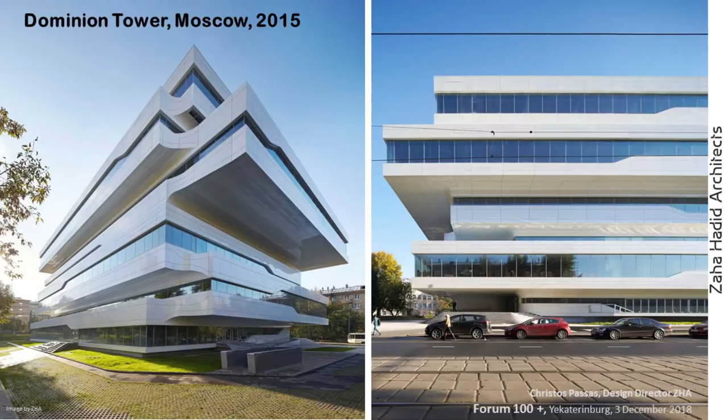My particular engagement with architecture in Russia was when we started the Dominion Tower around the year 2006. When I visited the first time, it was a very interesting and in many ways eye-opening experience, because Russia was in a transformative period at that time. In 2015, when this project was finished, a lot of things had already changed. Most of the ideas about this particular building look back into those kind of constructivist, radical spaces where the idea of architecture as a gravity-less space becomes possible to think about. I think this idea of humanity's adventures opening into space, but also understanding our relationship to the ground, the land, and the way we produce ideas, became rather important.

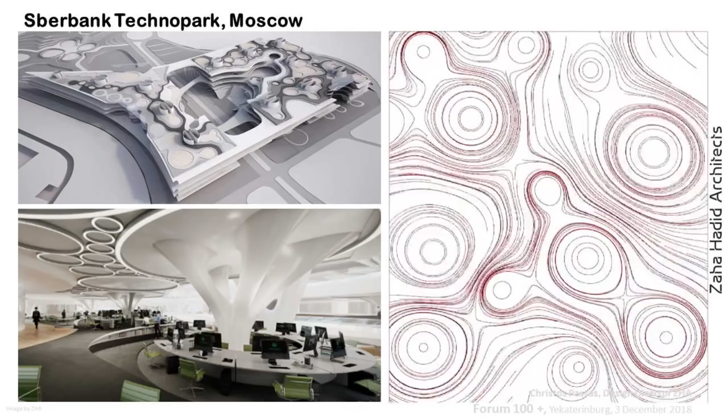I'm happy to announce that this project is now on site. The client is now looking for a general contractor to come along and build it. There is a big hole in the ground waiting for the basement works to start.

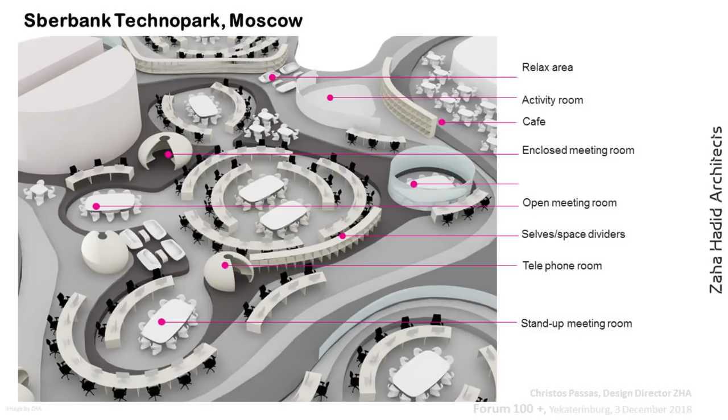Yes, this is the kind of ecology that I was speaking about. It's an open plan office, but also with cubicles where people can work in relative acoustic or visual isolation. Essentially it's this ecology of different types of spaces. Workers don't necessarily need to be fixed to a particular desk and laptop, but can take their machine with them and sit with people doing relevant work to collaborate and help with their tasks.

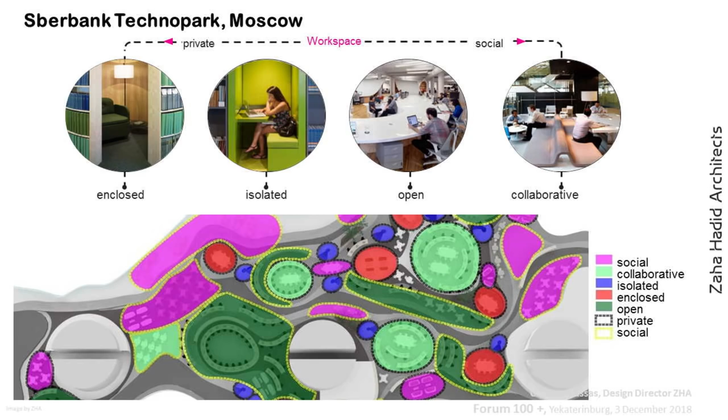So these degrees of privacy that I was speaking about, whether enclosed or isolated spaces or open spaces to work with 100 people, are all within one, let's say, soup—an ecology of conditions.

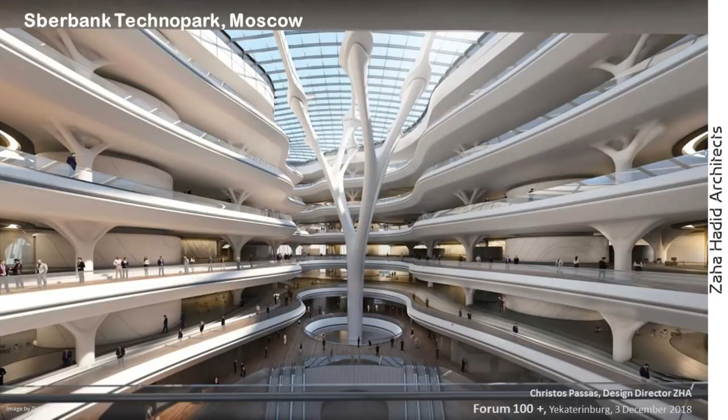Such a building needs to be driven also by its possibility to navigate through the space. The atrium is a pretty important feature, not only as a place where light comes in, but also a space where one can immediately get an overview and see where different things are happening, so they can freely and without the need of signage move to the right places of the project.

There is a big site around it which we want to bring inside the building. So the glass facade is designed as a means for controlling the environment and temperature, as usual, but at the same time to bring as much of the external environment inside.

In order to let the light penetrate as deep inside the building, we even lifted up the floor slabs of each floor to 6.5 meters, about 50% more than what is usual, so we can let light come in but also create a sense of space that is not compressed and very tight.

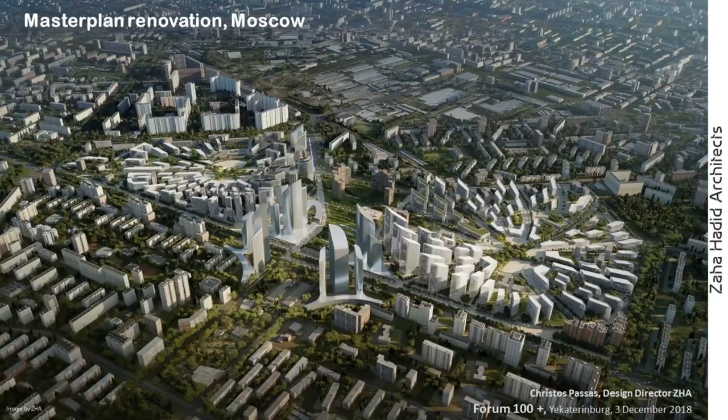Okay, moving on to the next project. This is our conceptual approach for the renovation of the residential quarters in Moscow. This is a rendering of the area of Kuzminki.

You may have heard about this project because the government had announced they wanted to investigate solutions produced by architects and other specialists on how to renovate the Khrushchevkas that were built in the 1950s and 60s, because that residential stock was already becoming old, and a lot of people are living in substandard conditions. The idea was to relook at how this modernist zoning plan is working, and to try to create a new sense of community.

Some key aspects here: buildings are laid in the landscape, but the spaces between them have a lot of trees on one side, though they're mostly occupied by cars. People love the trees, but the public space between them is indeterminate, meaning nobody owns anything or is responsible for anything. Therefore it becomes very difficult to take care of.

Our proposal was to create buildings of smaller footprint and higher elevation, so people can still have nice views and be in a neighborhood with fewer people, giving better possibilities to create a community sharing the same buildings. The most obvious thing was that these concept neighborhoods become areas with townhouses of 2 stories high, but also mixed-use buildings going up to 15 or 20 stories, housing shops, offices and apartments if needed.

So each one of these buildings have different characters. A central square is dedicated to public use and to the residents. These can be skating parks, these can be gardens, these can be places where people can use for barbecue in the summer.

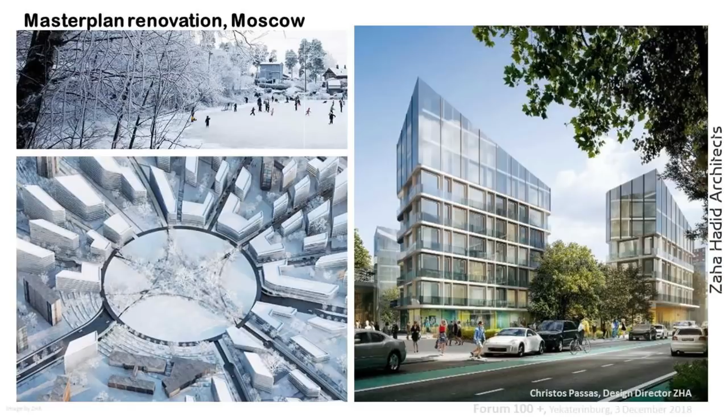But at the same time, the square urban block that somebody can see in Barcelona begins now to break and open up, so all the spaces between the buildings become more walkable. There is a definition proposed so that the gardens become both public but also private, meaning owned and taken care of by the residents of the building, so that the urban landscape becomes a little bit more organized.

And here is another project that we developed for the city of Novorossiysk. This is the Admiral Serebryakov embankment in the Black Sea. As you know, Novorossiysk is an industrial port, and we were invited there to offer a phased master plan, a solution where the city could extend, but also transform into a MICE type tourist attraction. There is a lot of oil and gas companies working in the area.

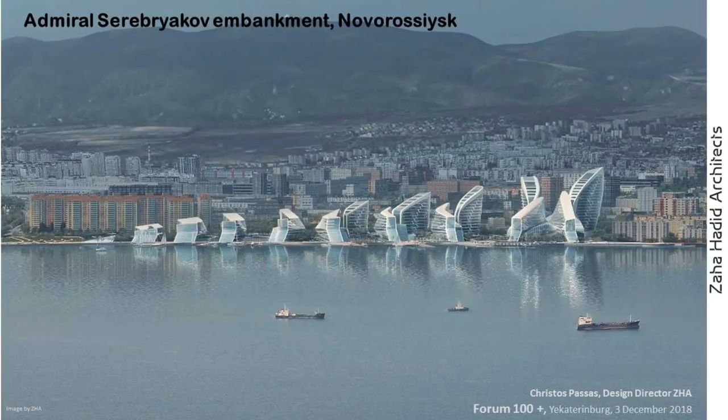What was important for the investor and also the city themselves was to create a project that could be developed in stages. Projects developed in stages are a bit of a nightmare for architects, because sometimes you see buildings that are literally chopped off in half and you're waiting for the next phase to start. So in this case, we made this problem into an opportunity.

We broke the phase down into 9 different buildings, starting from an anchor building at the very beginning, which consists of a mixed use agglomeration of a business hotel and a family hotel, a convention center, and a cinema. So we are able to provide a new facility, a new service, both for the local residents, but also for the incoming business tourism that would come there.

We are proposing the development of a series of marinas, of little docking stations, both for private yachts, but also for fishing boats that exist in the area.

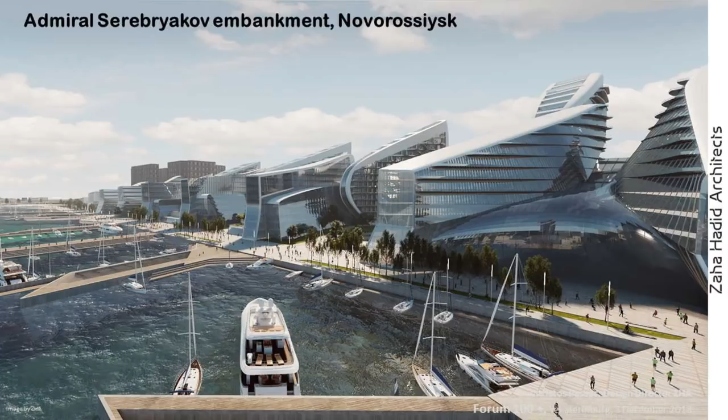And of course, the buildings gradually go down into different heights. So when we start with the tourist attraction in the beginning, we also go down very low toward the end, where we develop the end of the site into a botanical garden, where we want to collect seeds from plants of the area to store them in a safe place, and also make a kind of a gardening pavilion for people who enjoy more the kind of ecological arts.

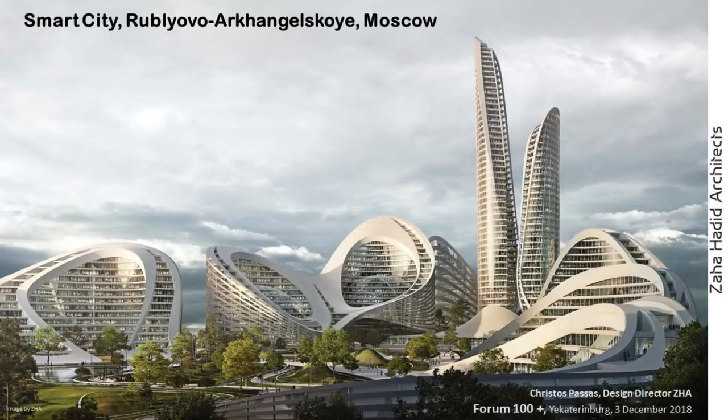The next project that we are working on in Russia is a competition we recently won together with 3 other companies for the Rublyovo-Arkhangelskoye area. This represents a proposal to develop a city over 25 or 30 years. This is meant to be a satellite city, a new heartbeat outside the center of Moscow.

We know Moscow is a city that is challenged by traffic problems. And what we propose to the client here is that the architectural future and definition of this city is not so important. We, in fact, proposed 2 different solutions for them within the time that we had available.

But we are proposing an urban master plan that consists of buildings of mixed use, where people can connect with sky bridges from one building to the other, where you can have shops and also residential units and sky gardens on top of these buildings, creating a new kind of typology for 21st century living.

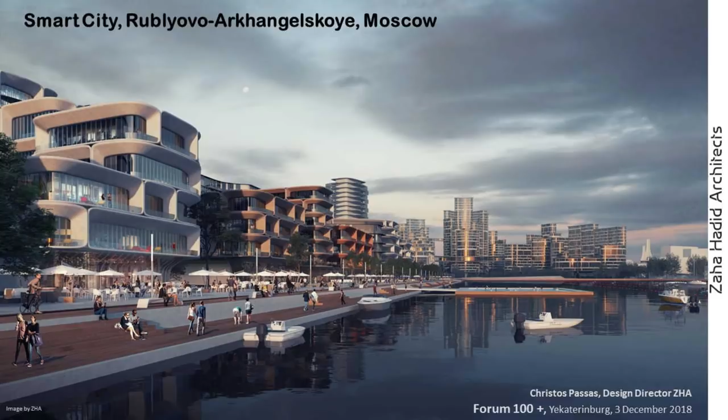We are also exploring the ideas of the residential spaces here, more than the business district, where the buildings are shorter, with more glass, in some cases with balconies, and opening up to a lake that can be programmed with swimming pool or recreational activities, so that people who live there can also work in this territory without having to go back and forth 2 hours in their car every day from the center of Moscow and back.

So the idea of the smart city is that we come closer to the environment, we recognize the realities of today's business and how we work, but also try to shorten those wasted times that we spend in the car, the fuel consumption, the pollution, and also trying to make spaces livable close to the place of work as a means of being smart about how we operate and live our lives.

So the point is, we are engaged and we are being asked to develop solutions in different aspects of architectural discipline. And one of these aspects is our engagement with cultural buildings, which is the second part of what I would like to speak about today.

I would like to start with this on the occasion of the Philharmonic Hall that everybody in the room has in mind. I hear there's been a bit of controversy, but what I'd like to concentrate on is what are cultural spaces, what are the spaces where, like today, we're sitting in this room with about 400 people, all interacting currently. There's usually somebody on stage, and I think this arrangement of the theater and the presentation is something humans developed a long time ago.

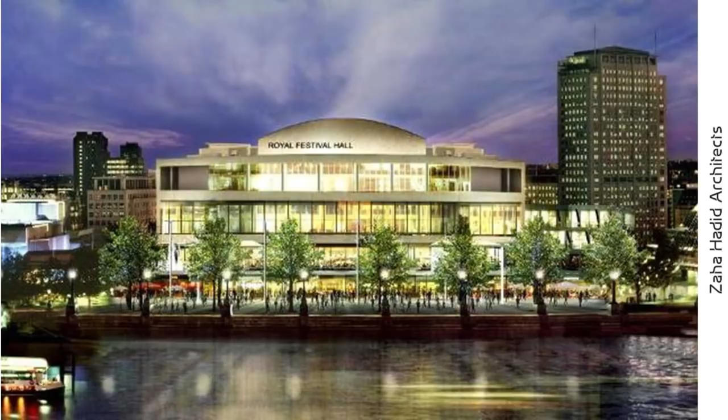In the 1950s, after World War II, for the Festival of Britain, the Philharmonic in London moves into this building, the Royal Festival Hall. It's on the bank of the Thames River, and you can see it's a much more modernist, somber type of building. Again, the organ is in the back, the place of the orchestra, and what's characterized here is rather important for the evolution of Philharmonic halls in architectural history, because it is a shoebox in a way—a square plan with a kind of inclined, stepping roof.

So a shoebox is similar to the type of building we are in right now—of course, with a wavy ceiling to propagate acoustics, and some balconies for VIPs and guests that essentially function as a place to be closer to the orchestra and the Philharmonic as you come in.

A radical new step was taken by Hans Scharoun in Berlin in 1963, when the Berlin Philharmonic moved into its new building. The Germans here are up to something rather interesting, because for the first time, this auditorium became a kind of vineyard typology, developed in plates. So not everybody sits in the same space like you are now—instead there are territories, little balconies on top of each other, and this landscape of balconies creates a much closer connection to the actual orchestra playing in the middle.

That creates a new space, a more democratic space, where the performer and the public come closer together, almost like a Brecht theater where the actors run in the middle but the whole thing becomes one—so there isn't that separation anymore between performer and spectator. We've all learned a lot from this, and these spaces are actually quite unique, both in their architectural innovation and in terms of their acoustic performance. Musicians like these spaces quite a lot.

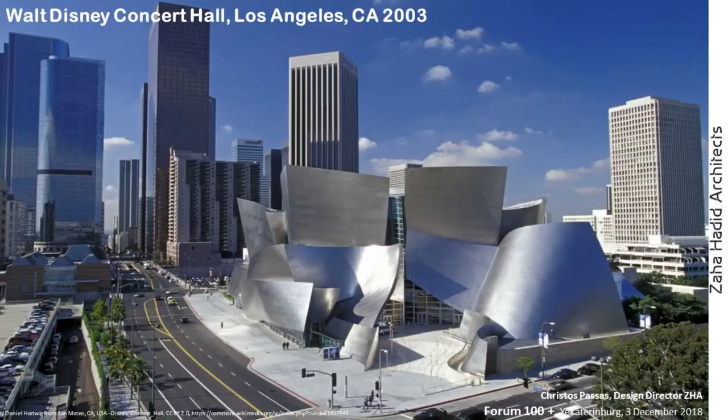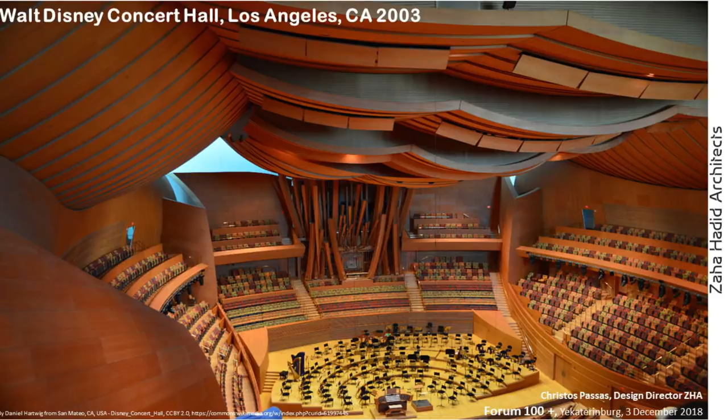So from 1963 until today, roughly 50 years later, about 10 years ago Frank Gehry was invited by the Walt Disney Corporation to develop this building in Los Angeles. For all its extravagance and strangeness of form, it's a project I admire because of its history, its making, the kind of space it creates, and the humility with which an architect engages this object to produce a social space where everybody can participate in the performance.

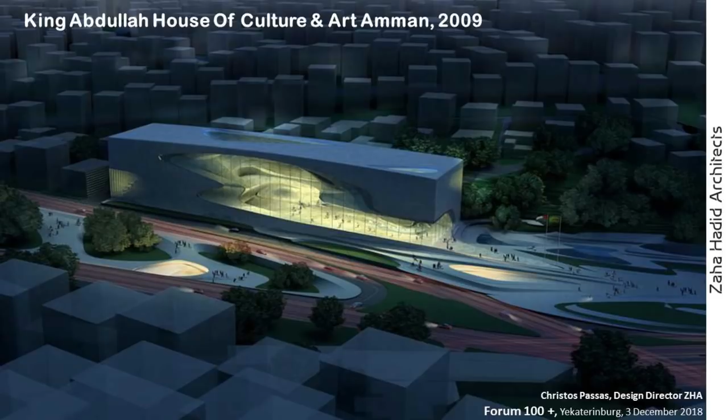From our point of view, we've also been engaged in cultural and performance centers for quite a while. This is one of our first projects, designed in 2009. It resembles the eroded rocks in Petra, near Amman. Basically it's the agglomeration of two auditoria in the solid parts of the block, and the middle space becomes the public space, the lobby, the new square in the city of Amman. We were experimenting with the type of auditorium, the kinds of balconies, and how to bring the audience closer to the stage.

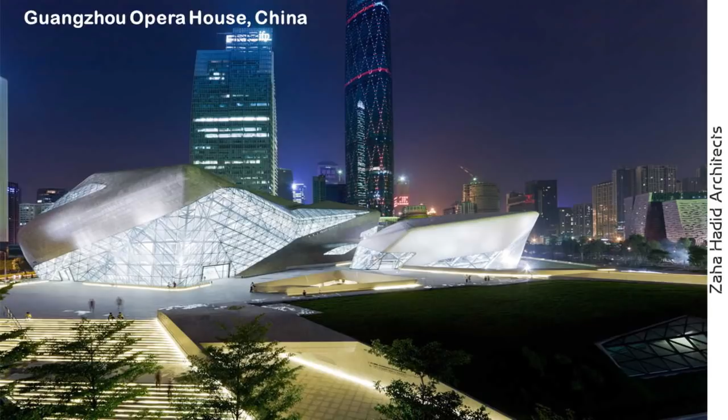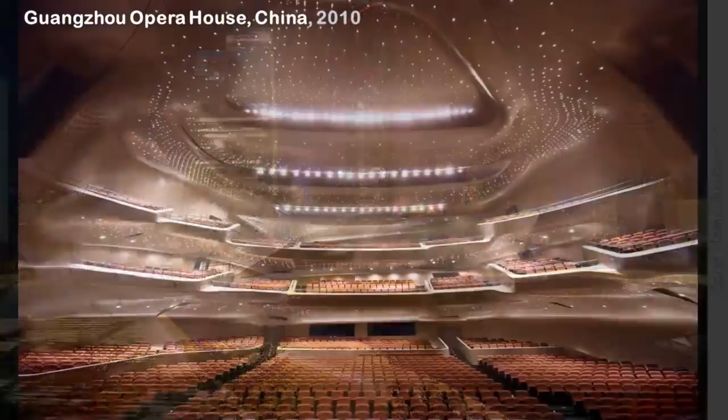Another project we finished successfully is the Guangzhou Opera House. This is an agglomeration of two rocks with empty space forming between them. It's the difference between the main auditorium, a place of opera in this case, that can hold up to 1,800 people, and the rehearsal halls in the smaller volume that can hold up to 450 people. This is the interior of the auditorium, a spectacular space built with a lot of traditional Chinese stage-making technologies, gypsum, boarding material, and golden paint, creating both an acoustic and a visually performative space.

Zaha always felt this was an interesting project because it housed three functions under one roof: a convention hall, an auditorium or theater space, and also a library. So it becomes a civic project that can invite different user groups inside, whether for educational purposes, children's classes doing a painting workshop, or a tapestry exhibition I've seen recently hosted by the Aliyev Foundation, and also a lot of performances.

And of course the auditorium is quite an interesting design because it's modern on one hand, but in some cases on the stage one can see very traditional kinds of dances, becoming an interesting container for ideas that can be both a testament to traditions and also more modern performances.

In fact, when we were building this auditorium, we engaged a workshop in Turkey. There was a guy with his group of 10 or 15 woodworkers, and they cut stripe by stripe this whole piece of wood with which the auditorium was dressed. This is the auditorium's acoustic envelope, but at the same time the architectural enclosure, and we felt it was a rather successful proposition in the end.

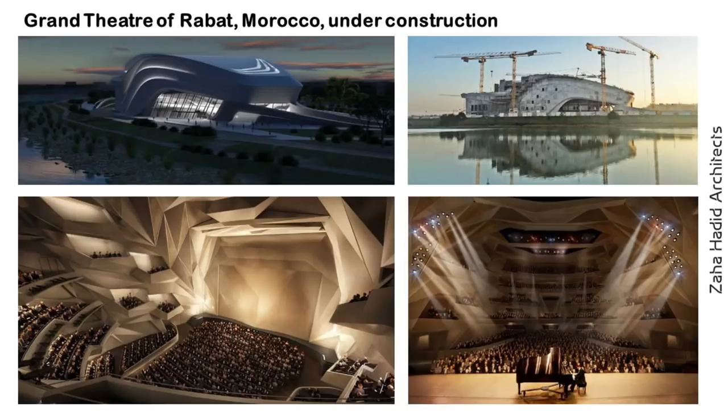We're currently involved in a number of other projects. One of our most important is the Grand Theatre in Rabat, Morocco. Our colleagues are traveling there almost every week, supervising construction together with local architects. This building is made of concrete and will later be dressed with this triangulated morphology on the inside. It's also based on a vineyard typology, and again the same conditions of trying to be close to the stage were quite important for us.

These are some of the drawings we do, both to define the interior skin and to examine how each and every person inside this auditorium can have a very close and compressed relationship to the stage, but also good visibility to the whole performance.

Another building currently happening right now is the Changsha Meixihu project, which is a series of 4 buildings connected together, one of which has this kind of auditorium where we're exploring, again, the idea of movement and light within the inside. I can say more about that in a separate lecture.

As you have seen, most of our interest in these buildings is about capturing what other people do. In a way, architecture can be a background to this process of cultural innovation. What's important is the guy that's on the piano. It probably took him as long as it takes an architect to design and see a building constructed to write a piece of music. But these pieces of music are actually quite important. We all know Beethoven, we all know Mozart, maybe some of us know Iannis Xenakis and others.

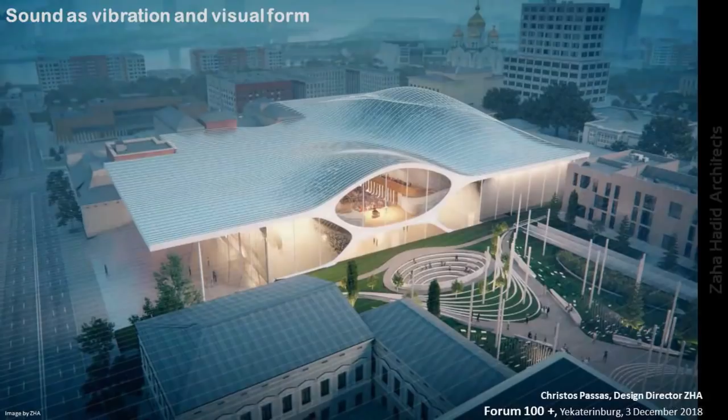The point is, how does architecture engage with this notion of sound? I tried to give you some hints already. What we do here, these are meant to be sound waves that vibrate to a rhythm, and every time a note is played, you can feel the undulation of this surface. For the Yekaterinburg Philharmonic, this was one of our starting points. The sound as a vibration in space, the thing that you don't see, was actually the formal element, the inspiration that we took in order to be able to look at this space.

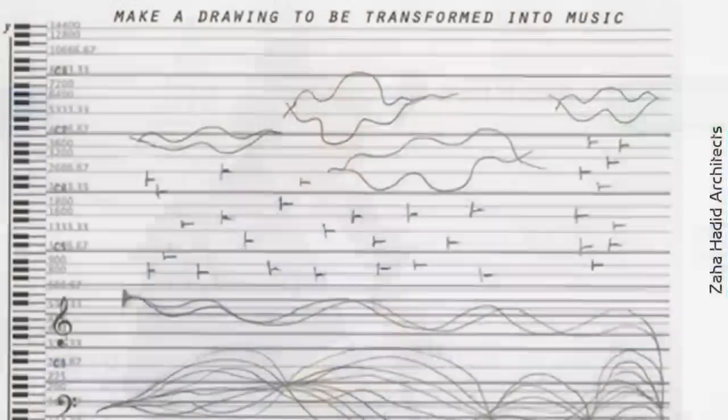What's interesting here is that sound has a form, it occupies space, and there is, we believe, a relationship between this sound form and the architectural form that needs to be explored more. Of course, radical and revolutionary musicians deal with this kind of issue of notation.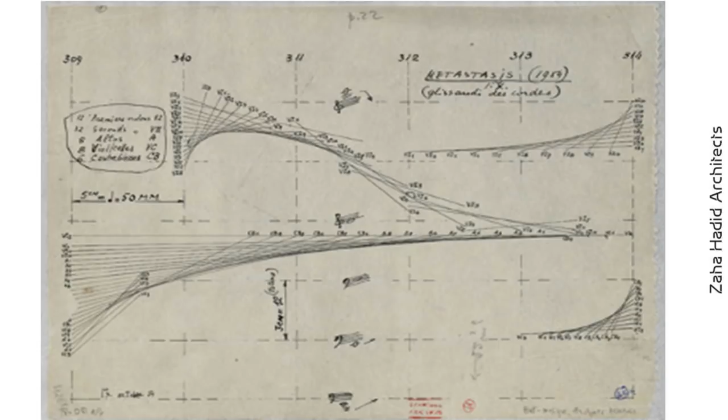I studied a lot Iannis Xenakis' drawings on his score, the Metastasis, which when you look at it in an auditorium and you see all the violins and the violas playing, all the sticks are creating, even if you're deaf, you can see this kind of amazing performance of musical instruments on stage. These are his kind of diagrams, how he drew the music.

Of course, he also worked with Le Corbusier. He did the Philips Pavilion, which is very much a thesis on how hyperbolic architectural forms - I'm not showing it here - become musical annotations and also architectural annotations.

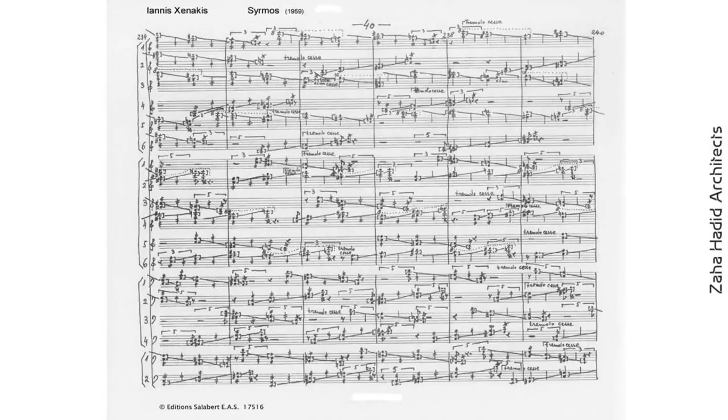Here is another one of his compositions. I like Xenakis because the way he annotates music is very graphic, and you can read things in his scores without necessarily understanding fully what the music is about. Of course, it can get quite messy. The annotation can become an instrument of language itself.

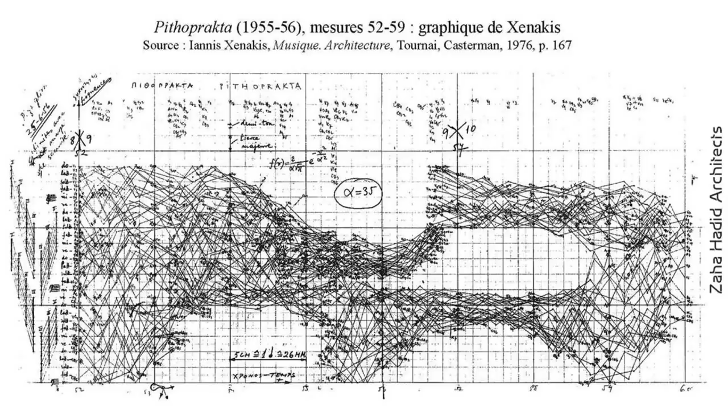I think this language is interesting and important, especially I would like to hint in this day and age that translation between two different codes and languages becomes an important skill to be able to attain, because you can have one system that speaks this language, you can have another system that speaks this language, but actually there are places of interpretation and connection that can be made, because essentially they can be speaking about the same or very similar things.

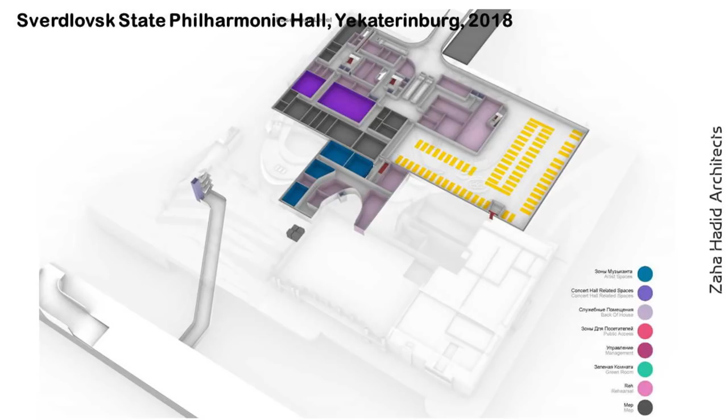I brought some slides about the Philharmonic Project that we proposed here, and of course I will go through it very quickly because I don't think I have a lot of time. But basically, what we're looking for here is to create a state-of-the-art facility that is very functional.

We are looking at the building roof as a means to be able to create a new urban plaza in Yekaterinburg, and also to be able to connect the existing buildings, the existing Philharmonic, together with the new facility. The existing building, which has an incredible history to it, holds about 600 guests, if I'm not mistaken. So it's a medium-sized facility that's neither small enough for a jazz or a piano recital, and it's not big enough to hold a proper orchestral piece with an orchestra of 120 people, for example.

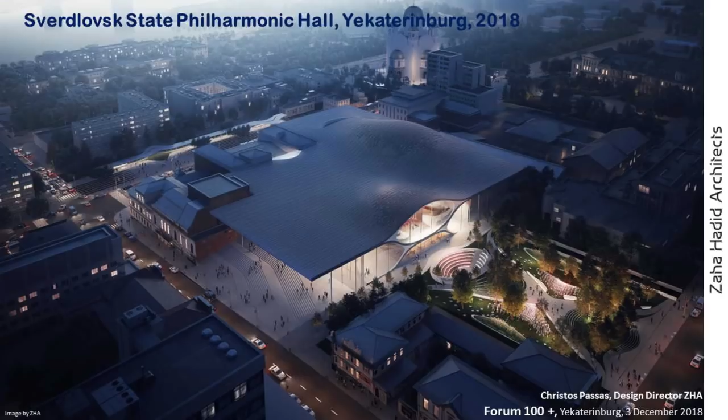So what the client wanted in producing this competition was to expand the capacity of this institution and bring it to a level where it can compete on the international stage, I suppose.

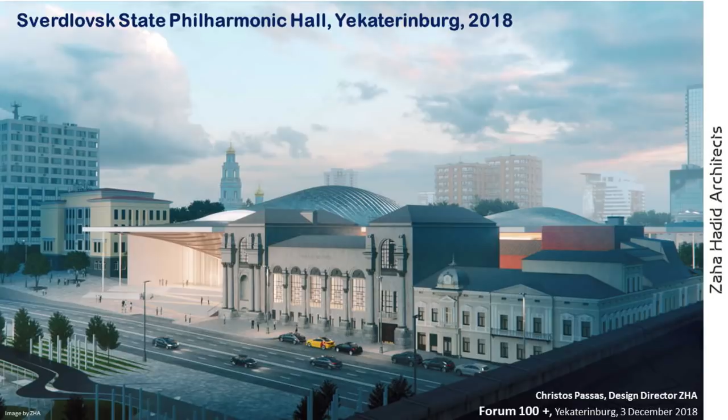Our studies initially were all about letting the existing, the old building be the front and the face of this new assembly. And although we have a big program to fit within this site, it was also quite important to give the front stage and the protagonistic role to the Philharmonic.

Although this building is very performative and very high-tech, it's also a building that sets itself and develops itself in the back. So whether the entrance of the Karl Liebknecht Street or the Pervomaiskaya access, they're working in the same way, using the void as the presence, as a way to bring people inside the building, while at the same time respecting and renovating the facades of the existing building.

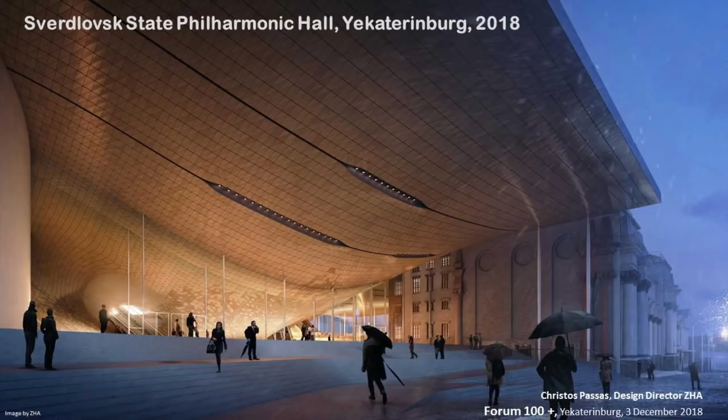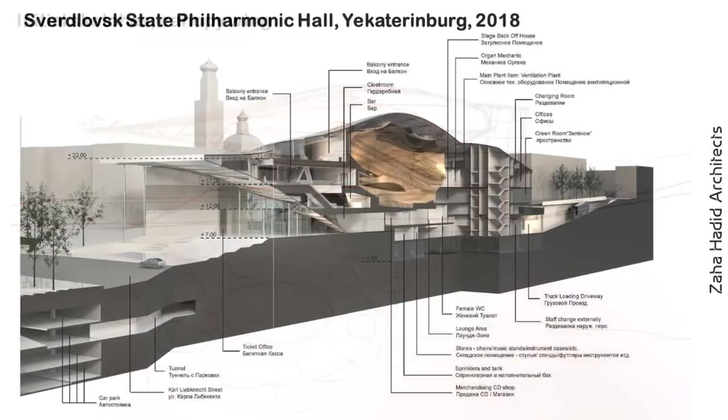Allowing the visitor to experience that old building all the time. The way of entering this building is important, because one can see from one side of the building to the other, a kind of shortcut that connects the two streets, but also gives an idea where the main auditorium is. One of our initial sketches shows how the form of the auditorium becomes a canopy, a wing, to protect people from the elements and the weather. The main auditorium is on a first, second and third level around inside this enclosure, this bubble.

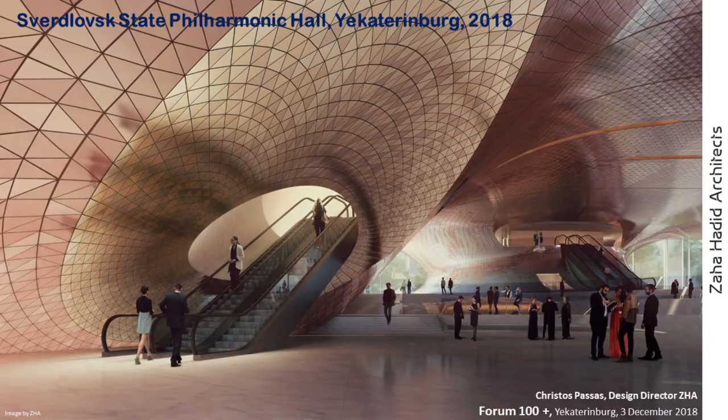The entrance to one of the entrances to the main auditorium, and in the back you can also see the entrance to the small auditorium. The space in between these two auditoria is a public space, meant for occasional music events, maybe a school band or a small group of local musicians. There is a restaurant, a bar, this idea of a public square, an enclosed public square to be used by people.

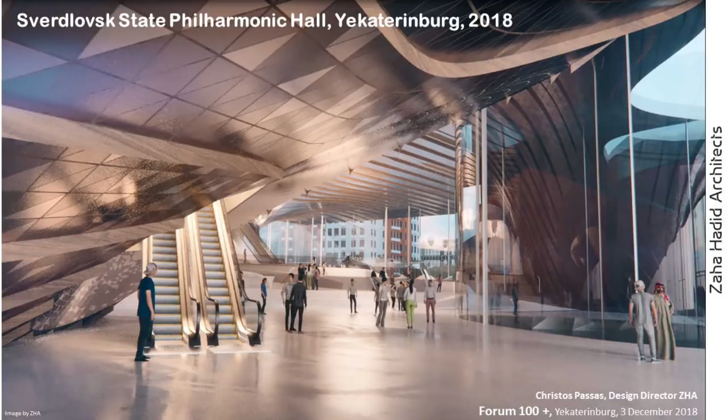This is the see-through view, and these are rather initial drawings, but this shows the possibility to walk through the space, going from one side of the street to the other. Another view of the lobby, and here some diagrams showing how the two auditoria sit in the back of the existing hall, the topography of the building moving up and connecting the two sides, and also the winter garden in the back.

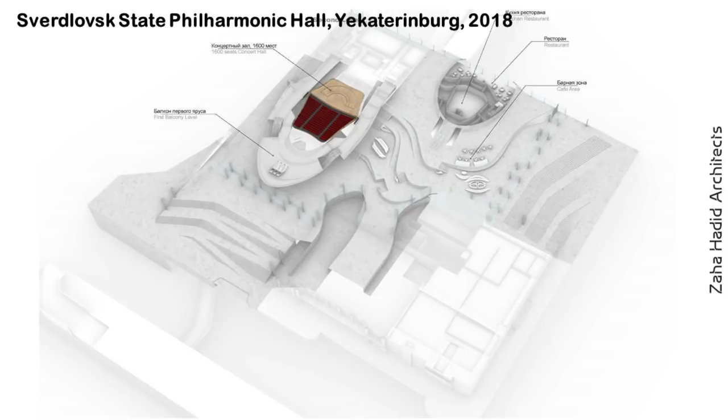Moving up inside the building, we can see the two auditoria, their acoustic envelope, and the auditorium space itself. We've taken great care here, interested in bringing all these people together, and this is one of our key drivers: to make an auditorium that is as small and as acoustically performative as it can be. We want this to be a space where the orchestra can enjoy playing music, in touch with people, using the enclosure as an acoustically treated material and form.

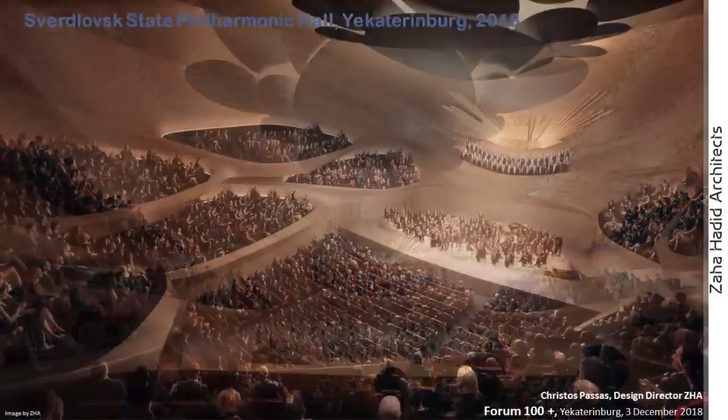That can absorb and control the reverberations produced by the music in these spaces. I'd like to believe it's going to be a rather warm auditorium, meant to be clad in wood, with treatment on the walls exactly for acoustical purposes. In some cases these buildings are interesting because you have to treat them like the interior of a musical instrument, like a guitar or a violin. If you've ever seen the inside of these instruments, this is the kind of space where the sound gets generated and produced, and this is something we can think about in this way.

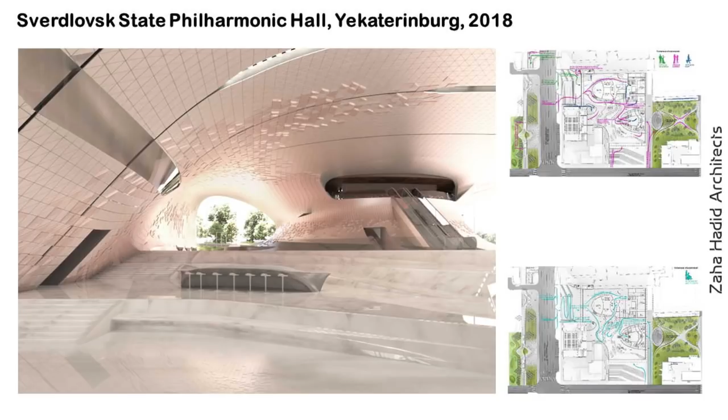The small auditorium towards the back, on the east side of the building, has a special feature: a big window that opens the whole performance space up into the inner garden. Whether it's winter, when the garden is full of snow, or summer, when you can see the water features and trees blooming and people moving about, you're at the same time in this acoustic capsule where you can hear the most amazing sound. I believe the connection between inside and outside, especially that people walking outside can witness the performance inside while it's going on, is an important aspect of this building.

We've done two concepts for this small auditorium. We weren't exactly sure yet how it should be treated architecturally.

Of course, there is a lot of work that still needs to go into these spaces to get them perfectly right, but we hope to be given the chance to develop these further.

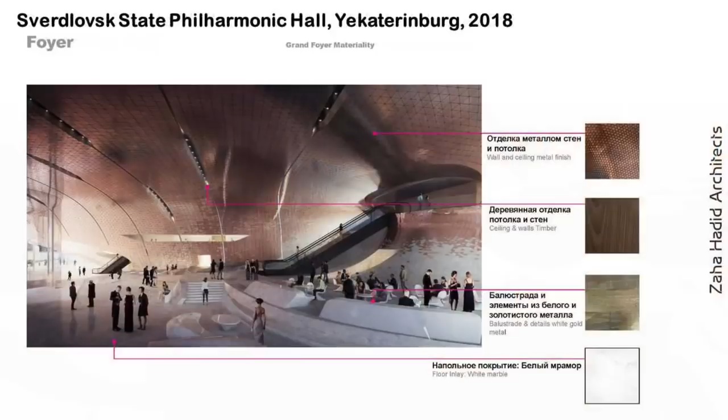We're looking at materials where we try to make a connection between the traditional lead roofs that we see on a lot of buildings here in Russia, which is a simple system, for the top surface, and then for the inside surface, to find something that feels a little bit more like copper or bronze, maybe some wood textures, to get a sense of warmth and maybe some reflection.

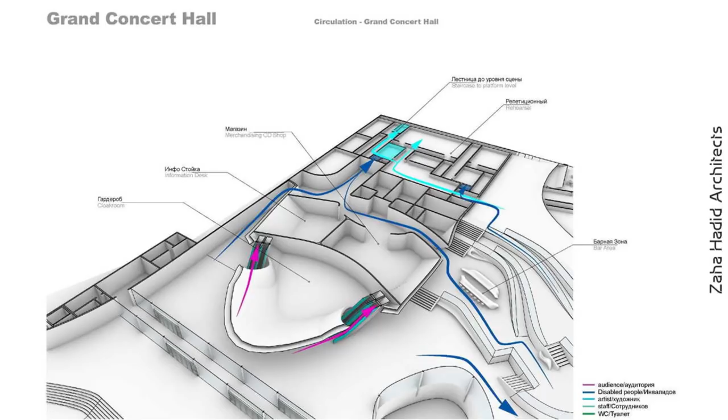So coming inside the building, the foyer, the cloak room that is right in front of the entrance, the back of house spaces in the back are easily accessible from the lobby, but also from a back corridor, information and ticket desks, and of course the stepped landscape of the lobby that creates different spaces inside this public building.

Moving up, coming to the first level, the concourse level of the grand concert hall. The second level, which is the balconies, and the third level, which is the higher tier of balconies, together with the bar, toilets, storage spaces, and so on.

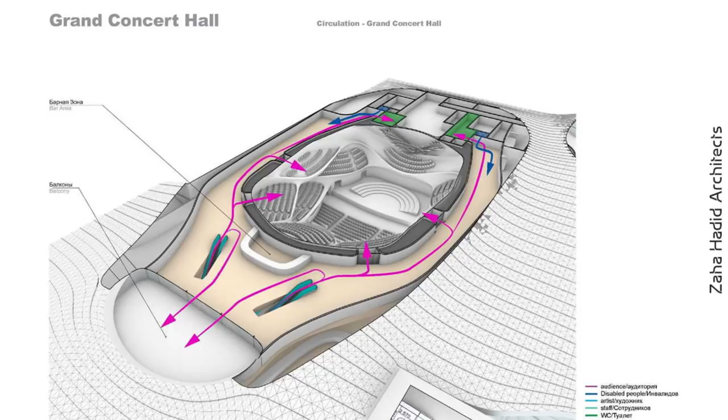And of course, we wanted to introduce a balcony for outdoor activities, maybe a cocktail or a kind of a smoking break, where people can also oversee the church that is very nearby.

So the auditorium as a kind of a vineyard typology, bringing both the orchestra and the public together in one space, is an important attempt here, because I think the Philharmonic here, the Ural Philharmonic Orchestra, is one of the things that this region and this city is known for.

And I think the people of the Philharmonic, Alexander Kolotursky, whom I've had the pleasure to meet recently and spent a lot of time talking to, but I think also his whole team are very much proud of their achievements. They work very hard, and maybe they deserve a kind of a state-of-the-art, world-class house to be able to honor the attempts of all these people and the musicians that play there.

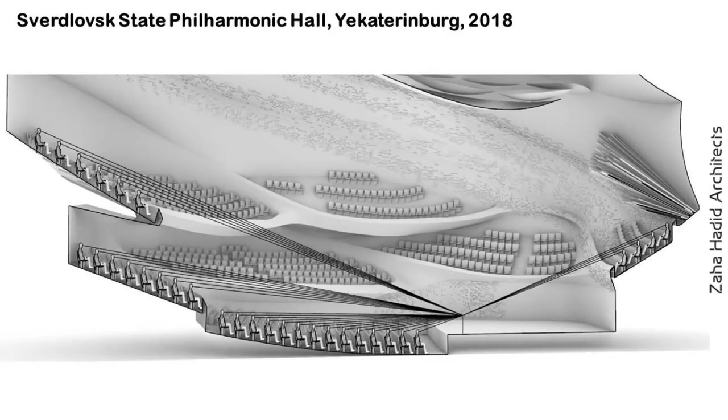So some of our initial studies—Alessio Constantino is here with me, our project architect, has been working on this project for the last 6 months, and has been key leading the team to develop all the technical documentation and make sure everything works right, starting from the visual angles and the visibility and the compression, the distances between stage and balconies.

We worked with a series of internationally acclaimed specialists in the acoustic field, in the field of theaters, to be able to get legitimate and accountable advice on how to make these designs.

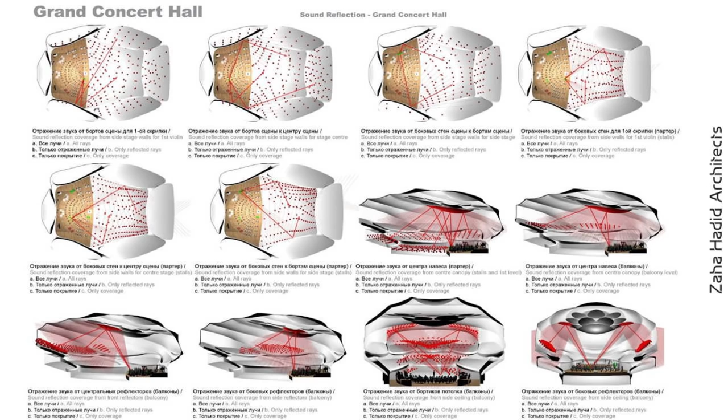This is some of the work that our team has done, testing, already beginning to simulate how the acoustic interior of this concert hall can be developed as an eardrum, as a kind of a musical instrument where these performances will take place. And we're looking into everything, including what the ceiling looks like, how the light comes in, where people are sat, what they see exactly, etc., so that it becomes a very well designed and engineered kind of space.

So remember this project I showed you in the beginning that was designed for Amman? We picked up these drawings because we wanted to show how far these kind of studies can go, also on a technical level, to make sure that these spaces are designed properly.

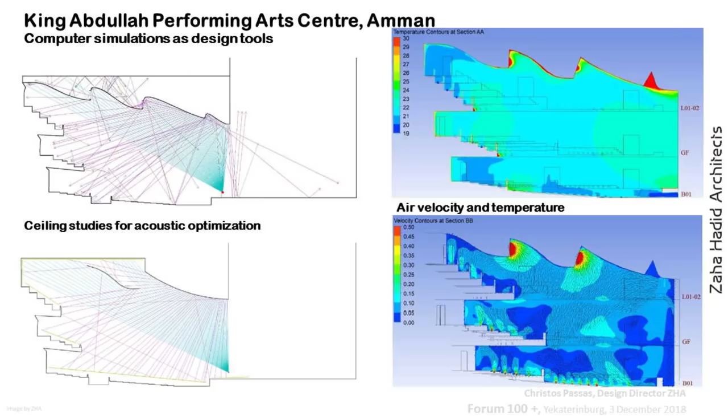And of course, there are people and specialists together with us who control everything from the way the ceiling is formed and how it reflects sound in the different areas of the space—looking at how we started in the top left-hand corner and how we ended up harmonizing and directing all the sound rays in the right way and in an orderly manner so that everything works well. Looking at temperature inside the space so that one feels comfortable sitting in a performance for 1 or 2 hours, and how the airflow works.

And you can hear the machines now playing, right? It's not a very good acoustic space, this one, because you can always hear this whizzing sound in the background. Can you imagine a John Cage piece playing and he stops for 5 seconds, and suddenly instead of hearing silence, you hear the machine playing? It would be a disaster, so we don't want that. What we want is machines that are totally silent, so that when there is meant to be silence in the space, there is silence in the space.

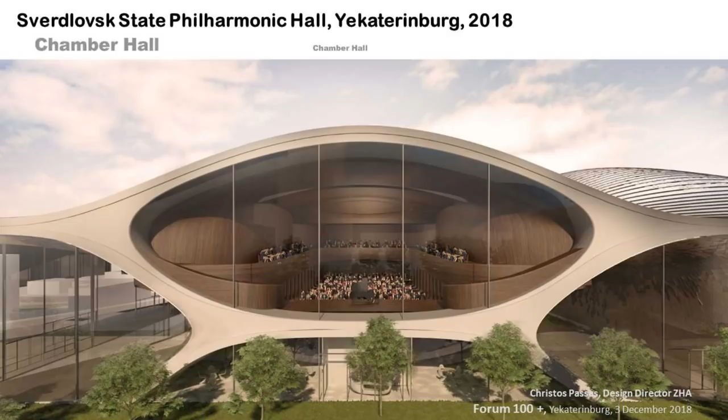And yeah, the materiality, we spoke about the wood, I spoke about the window that opens up this space. It is a public space. It's a space of the city, so the city should be able to see in as much as this eye can see out towards it. And of course, this is all in the spirit of bringing things together.

Here are some diagrams, initial diagrams of the small recital hall. This is a space with a 400 people capacity, and we're still working on finding the right solution for this. Of course, one architect would hope that when the design is developed enough, we will build a little prototype room, maybe in a scale of 1 to 10, and the conductor of the orchestra can go inside and listen to what this space is going to be before it even gets built, so that we can be sure the orchestra is happy with this.

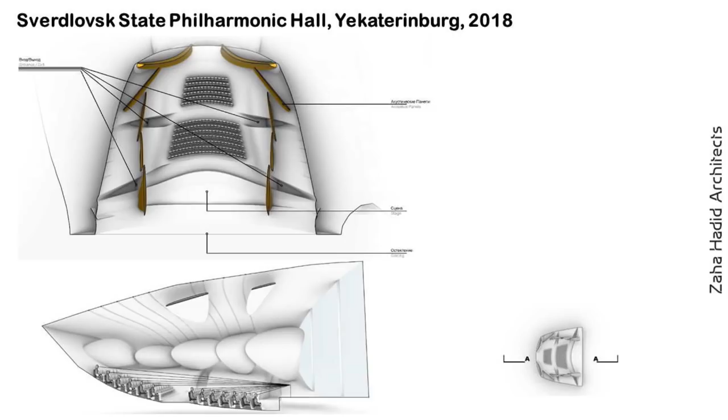Some of our drawings investigate those reflector panels and how they can be placed. These are all initial studies, the kind of stuff we are looking at before we produce images to convey what the spaces are looking like. And of course, here we're trying to increase also the visual impact of the space without increasing the number of seats, increasing the acoustic reflectivity, and so on.

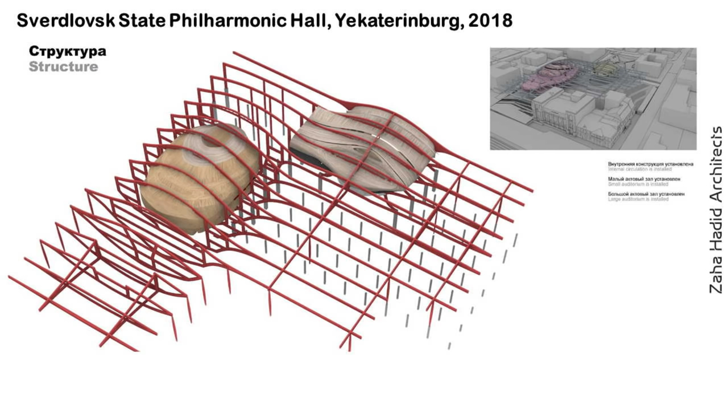The structure of the building, we do engage structural engineers from the very beginning to be able to see how these kinds of spaces can be constructed in a commonsensical way. We know that there is a lot of steel produced in the area, and the steel industry in Russia is very advanced, so we want to take advantage of this expertise to create a series of long-spanning trusses. It's important that the space below the building is kept free, so the trusses need to be deeper, but that's where we can also hide all the mechanical equipment and the acoustical spaces.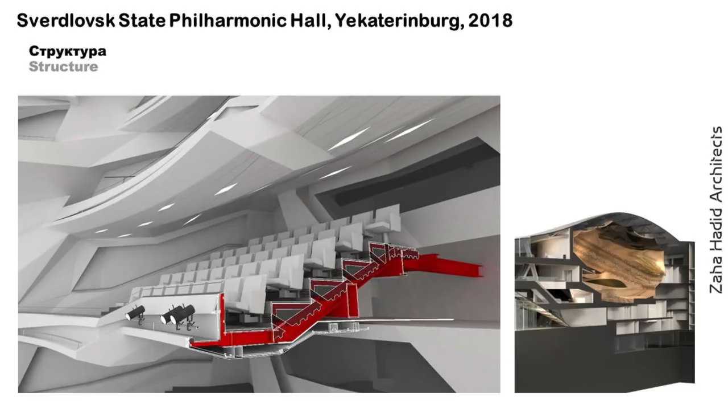We look into more detail how the balcony can work, and of course the reverberation, or the vibration if you like, on the balcony, which when people are coming in or when they are sitting is also quite important to control.

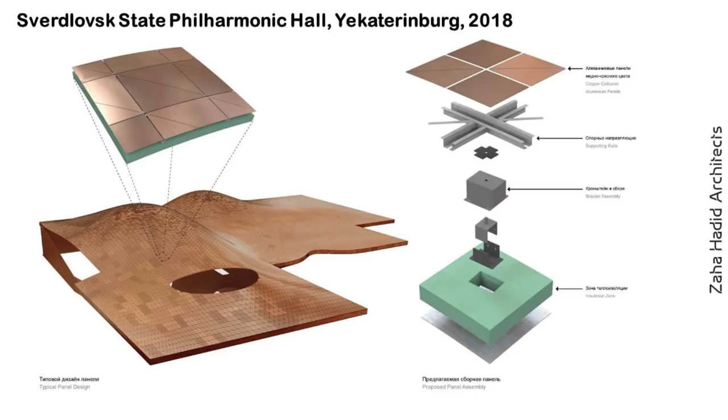The skin, I don't want to get into too much into it. We made some initial propositions, but I think it's an aspect that needs to be thought of and developed a lot more. We're looking at the rain screen type of roof at the moment. We know about cleaning issues, snow loads, and all the rest of it, and I think it needs about maybe 6 to 8 months of work before these issues can be resolved. But this is our initial proposition, to use simple metallic panels to clad this building.

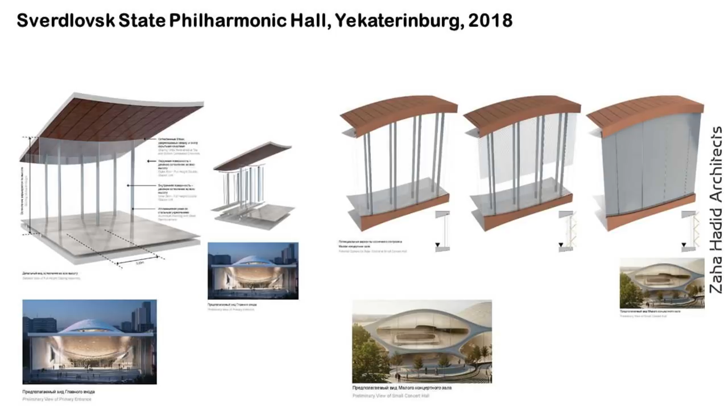The facade, we chose to propose a facade made of glass, so that on the ground floor the building feels very transparent and very welcoming, and you can see from inside out and from outside in. So this reinforces the idea of the lobby becoming a kind of public space, a public square if you like. At the same time, we could eventually specify these pieces of glass to have the right thermal insulation values so they can perform properly and allow the space to remain heated without excessive consumption of energy. These are some of the initial studies we're doing here. It shows the two layers of facade at the places of entry, and also how we can take the glass all the way up, with shading systems perhaps for days when we have glare and so on.

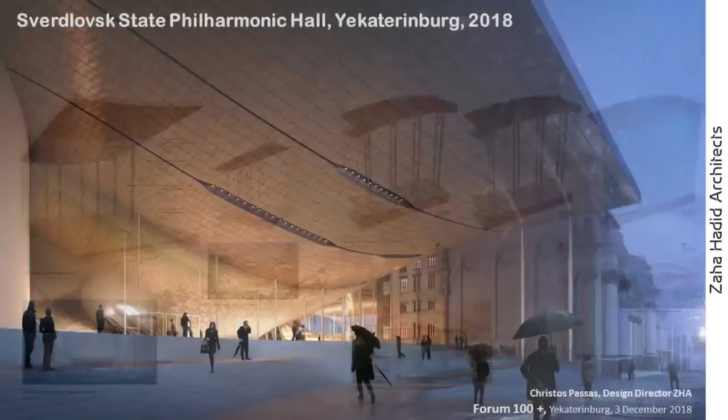Can we put the sound up, please? You got it? It would be nice if we can have sound. If not, then maybe we can play it. It's not working. Okay, well, it's a more visual presentation, so maybe we can look at it like this, and I can give a little bit of narration, starting from the idea of the sound waves.

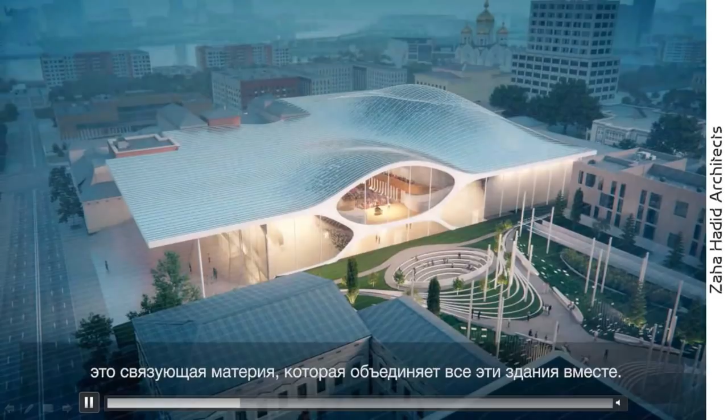And using this roof as a way to agglomerate a cluster of buildings, the form of the roof and the underside of the auditoria, part of the...

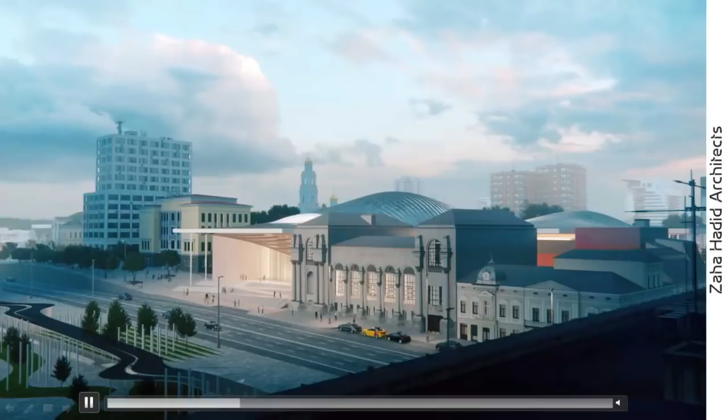Can I go? Just let it play, it's fine. It's okay.

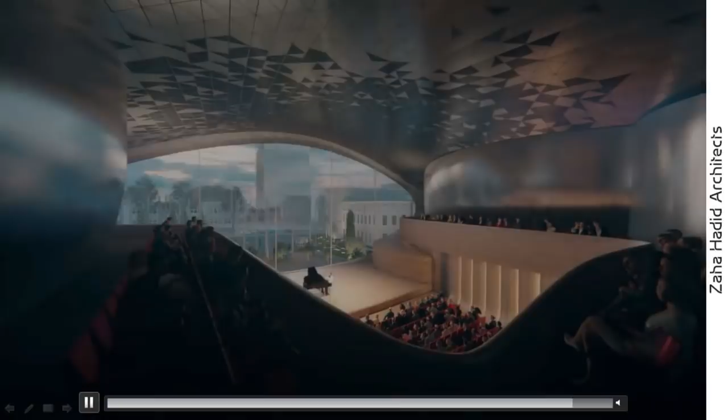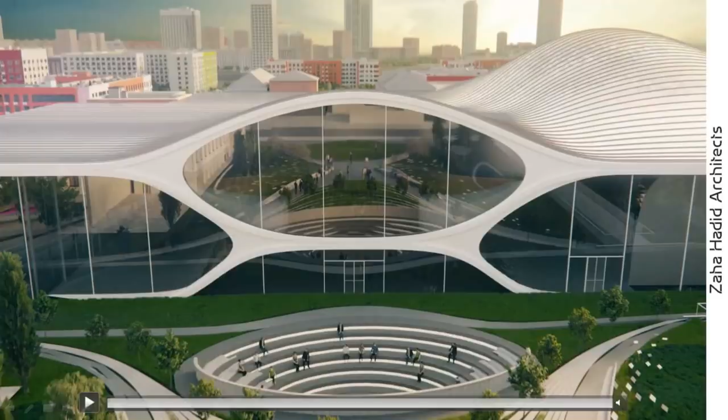Okay, and that's me for today. Thank you for your attention. I appreciate it.

Okay, lunchtime. Okay, thank you. Thanks very much. Can I get a couple of minutes of your time? How many is on?